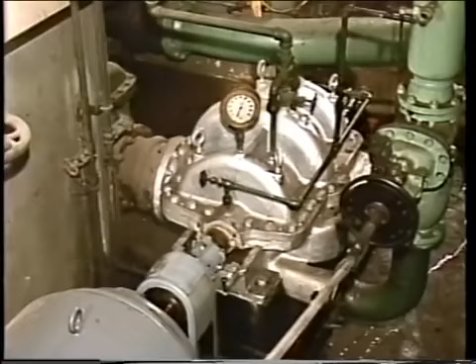Many types of equipment, such as pumps, agitators, or mixers, have rotating shafts that extend from a stationary housing. In nearly every case, some material or device is needed to seal around the shaft to prevent fluids or lubricants from leaking out and to keep contaminants from getting in.

Some equipment has packing material to seal around the shaft. Other equipment has a more sophisticated device known as a mechanical seal.

A mechanical seal is basically a device that is composed of two separate parts, one that mounts to the rotating shaft and one that mounts to the stationary housing around the shaft. When the shaft rotates, the rotating part of the seal spins so close to the stationary part that leakage around the shaft is virtually eliminated.

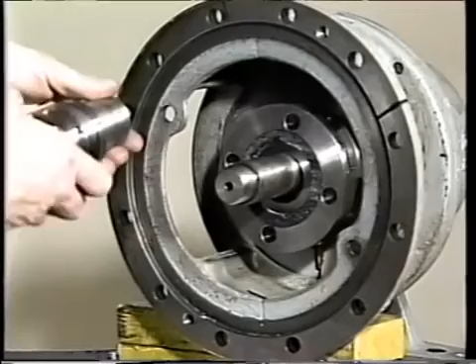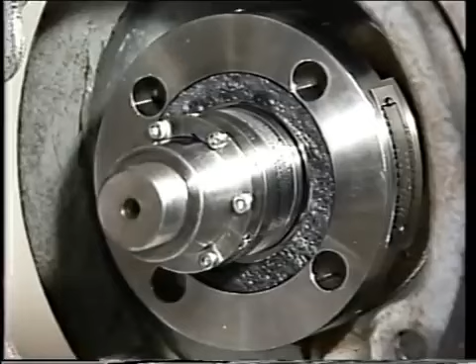There are many types of mechanical seals, and they can be used in many different situations. As a mechanic, you'll need to understand how these seals work and how they're installed. In this program, we'll spend some time examining mechanical seals. We'll see how mechanical seals operate, what needs to be done before a mechanical seal is installed, and how to install different types of mechanical seals.

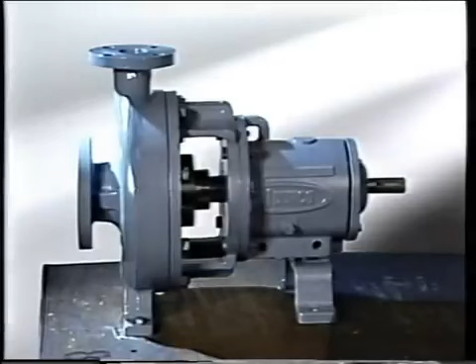Then later in the program, we'll look at some examples of mechanical seal failures. Since one of the most common uses for mechanical seals is in process pumps, we'll use that equipment as an example throughout this program. But before we examine how a mechanical seal works, let's first look at some of the basic parts of a mechanical seal.

Many people consider mechanical seals to be very complex due to the number of internal parts. Actually, mechanical seals are relatively simple.

From this cutaway of a typical mechanical seal, we can see the two basic elements, known as the rotating element and the stationary element. This rotating element, which mounts on the pump shaft and rotates with it, consists of a collar, set screws, a spring, and a rotating ring.

The collar and set screws are used to mount the rotating element to the pump shaft. The collar also provides a point for the spring to work against. The spring is used to hold the rotating ring in its proper position. The rotating ring has a lapped and polished surface, which is called the rotating seal face.

The stationary element mounts to the casing that surrounds the rotating shaft. This part of the seal remains stationary and works in conjunction with the rotating element. This stationary element consists of a gland plate and a mating ring.

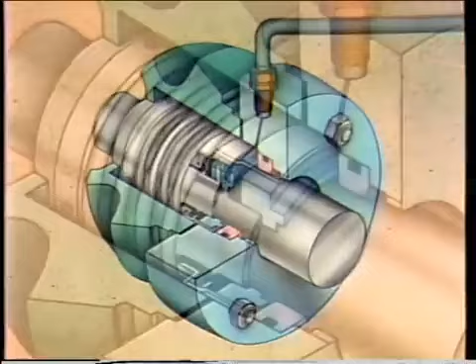The gland plate is a metal plate that mounts to the stuffing box of the pump. It is also the part that the mating ring mounts to. The mating ring also has a lapped and polished surface. This surface is the stationary seal face.

The stationary seal face and the rotating seal face work together to form the primary seal. This area is perhaps the most important sealing surface inside a mechanical seal. The condition of the rotating seal face and the stationary seal face is critical. Both of these surfaces have been lapped and polished to near perfection, and any imperfections could seriously affect the seal's performance.

Mechanical seals can be made from a variety of materials. The type of material used depends on the conditions that the seal must operate in, such as temperature, pressure, and the corrosiveness of the fluid being sealed. For example, the collar, spring, and gland plate are normally made from materials that are highly resistant to corrosion, such as stainless steels, brass, or other alloys.

The seal faces are usually made of materials like tungsten, ceramics, or different grades of carbon. Seal face surfaces made from these types of materials generally last longer.

Also vital to a mechanical seal's operation are O-rings, bellows, and gaskets. Although these items are simple, they serve important functions.

There are several places inside a mechanical seal where fluid could leak. The most noticeable spot is the primary seal surface, which is between the rotating seal face and the stationary seal face. But there are other points, such as around the shaft or casing, that have to be sealed as well.

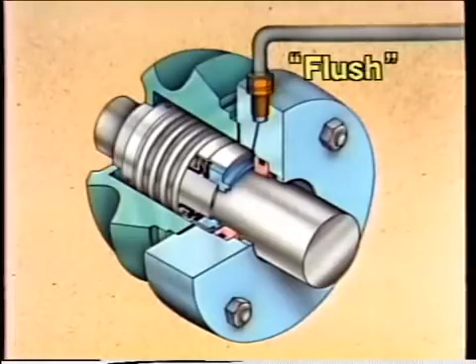First, it helps keep the seal faces separated, and secondly, it provides lubrication for the faces. Normally, this fluid is the same as the fluid being pumped, but in some cases, fluid is supplied to a seal by an external source. This fluid is also known as a flush. A flush can be supplied to a seal in a number of ways, but regardless of how it's done, the purpose is to lubricate and protect the seal faces.

For example, suppose this pump moves a fluid that contains abrasives. There's a possibility that abrasives from the fluid could get between the seal faces. If that happened, the mechanical seal faces could quickly be damaged or ruined. One way to avoid this damage would be to use an external fluid source.

Whether a seal uses the fluid being pumped or an external fluid source to lubricate the seal faces has little to do with the basic operation of the seal itself. All mechanical seals work on the same basic principles and can be divided into two basic categories: pusher type and non-pusher type. This is a cutaway of a pusher type seal.

A pusher type mechanical seal is one in which the rotating ring and the seal located between the rotating ring and the shaft are free to move along the shaft. In other words, the seal slides along the shaft with the ring.

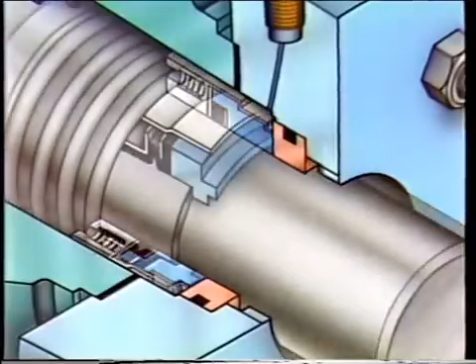A non-pusher type mechanical seal uses a different approach. The rotating ring moves as necessary, but the seal between the ring and the shaft is independent of this movement. Instead of sliding along the shaft, the seal, which is typically a bellows, expands and contracts to prevent leakage.

While there are two basic categories of mechanical seals, most seal manufacturers produce a variety of each. These include inside, outside, and multiple seal arrangements. An inside seal is one of the most common arrangements of mechanical seals. A typical inside seal has the rotating element located inside the casing that's being sealed.

An outside seal has the rotating element mounted outside of the casing being sealed. While the components are generally the same as those of an inside seal, the outside seal installation is different.

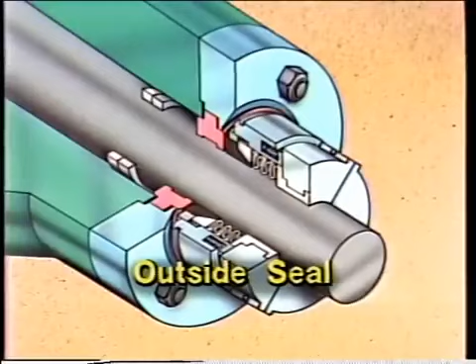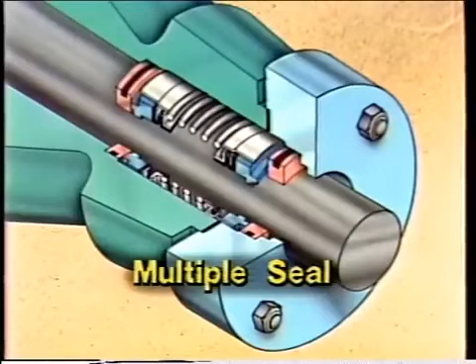Another type of mechanical seal arrangement is the multiple seal. A multiple seal is basically two or more seals mounted so that they work together. Multiple seals are sometimes used on pumps that move hazardous fluids because they further reduce the chance of a fluid leak. There are three common types of multiple seals available: the double seal, the opposed double seal, and the tandem seal.

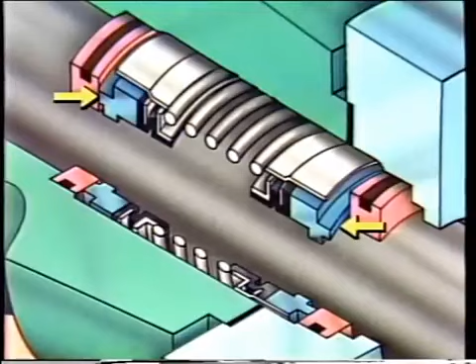A double seal has two stationary elements and a single rotating element. The rotating element has two rotating rings separated by a spring. Each ring has a lapped and polished face that works in conjunction with the two stationary seal faces.

Another type of multiple seal is known as an opposed double seal. An opposed double seal has two rotating elements and a single stationary element. The opposed double seal gets its name from the fact that the two rotating rings work against opposed sides of the mating ring. The third type of multiple seal is the tandem seal.

A tandem seal is basically two independent seals mounted together. Each tandem seal has its own rotating element and stationary element.

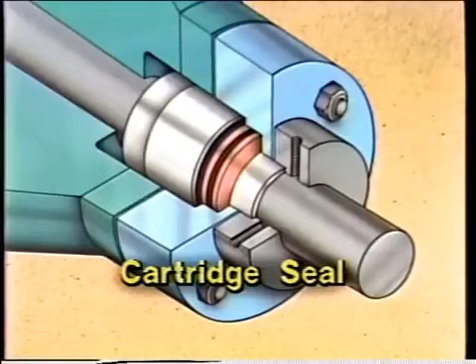Many inside, outside, and multiple seal arrangements are available as cartridge seals. Cartridge seals are designed to make seal installation easier. As you can see, the components of a cartridge seal are mounted onto a sleeve. By having the components pre-assembled, the time spent installing the seal is usually less than that of other seals.

Before any mechanical seal can be installed, certain preparations have to be made. When we come back, we'll see how to prepare for a mechanical seal installation by watching the disassembly of a process pump. But first, take some time to review the material in the text and to answer the questions at the end of the segment.

In the previous segment, we examined the components of a mechanical seal and saw how a typical mechanical seal worked. In this segment, we'll see how a typical process pump is disassembled so that a mechanical seal can be removed.

And replaced. As the procedure takes place, some general precautions should be followed to ensure that the seal can be installed properly. For example, the work area and the pump housing should be cleaned. Company policies and procedures should be followed, and all old gaskets should be replaced.

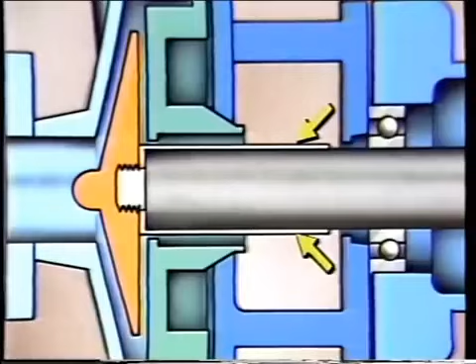Now that we've identified the components, we're ready to start the disassembly. We'll begin the procedure at the point where the pump has been tagged out according to company procedures and moved to a shop. One of the first things to do is to separate the casing from the pump frame.

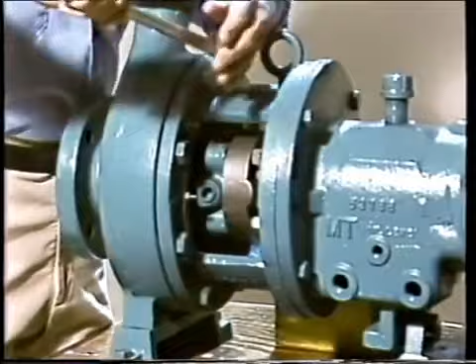In order to do this, the casing bolts must first be removed. Once the bolts are out, the casing and pump frame can be forced apart by installing jacking bolts. These bolts are turned in a crossing pattern to evenly dislodge the casing and frame.

With the casing and frame separated, the frame and bearing housing can be moved to the side to allow for easy access to the remaining parts. The jacking bolts can also be removed. Then the old casing gasket can be removed and discarded. A new gasket will be installed later.

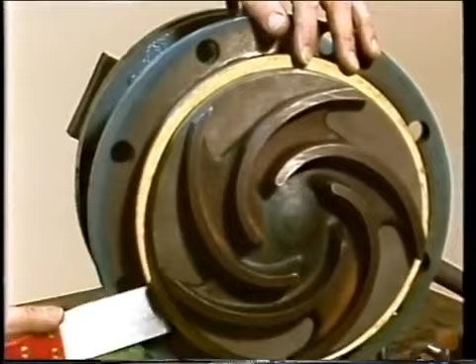Next, the impeller can be removed. The small impeller gasket can then be removed as well. The pump backplate should then be match marked with the frame before it's removed. Match marking these components with a marking pen of some sort makes reassembly and alignment easier.

In order to remove the backplate and the gland plate, the nuts that hold the backplate to the frame are first removed. Next, the nuts on the gland studs are removed and the gland plate is moved back out of the way. The backplate can then be removed and set aside.

This exposes the shaft sleeve and the rotating element of the mechanical seal. Then the shaft sleeve and seal can be slid off of the shaft, along with the gland plate.

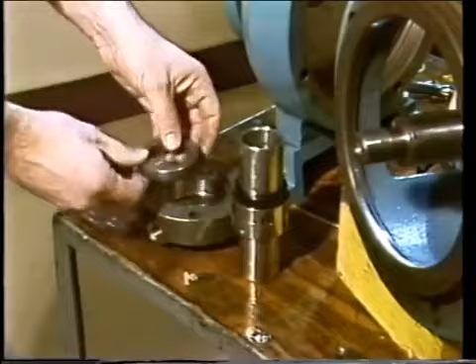Then the mating ring can be removed from the gland plate by simply pushing it out. The collar set screws for the rotating element can be loosened and the element slid off of the sleeve.

That takes care of the first part of the process. The pump has been disassembled and the old mechanical seal components have been removed.

Now, certain checks and measurements must be made before the new seal is installed. One of the first things to do is to check all machined surfaces for nicks and burrs.

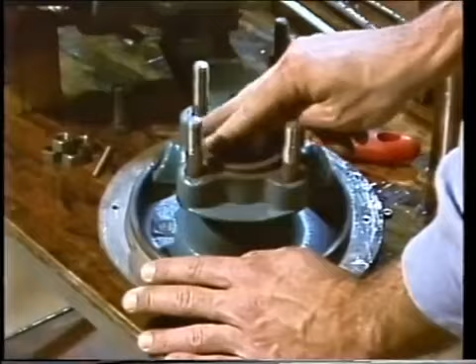Surface defects on the frame, gland plate, stuffing box housing, shaft, or sleeve could result in leaks and damaged components. Minor imperfections in these machined surfaces can usually be removed with a small file or crocus cloth.

Some pumps rely on metal-to-metal contact instead of a gasket or O-ring to seal between the shaft shoulder and the sleeve. On these units, the surfaces should be lapped to remove imperfections and create an acceptable seal.

First, the shaft key is removed and lapping compound is applied to the shaft shoulder. Then the sleeve is placed on the shaft and turned.

After a few minutes, the sleeve can be taken off and the lapping compound removed. The surfaces can then be inspected to make sure that the proper surface contact can be made.

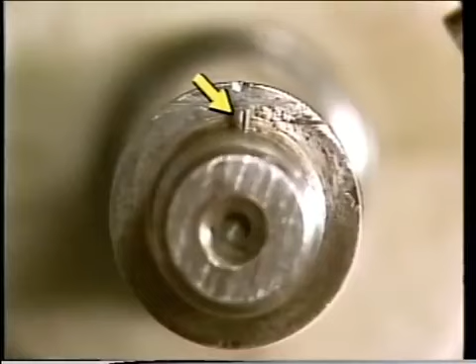The drive pins or keys and their alignment slots should also be inspected for signs of wear or damage. Damaged pins or keys could cause the shaft sleeve to move on the shaft and damage the seal and the pump components.

There are other important checks that should be made before a mechanical seal is installed. Some of these checks involve the use of dial indicators to make precise measurements of the pump. One important check is testing for shaft runout.

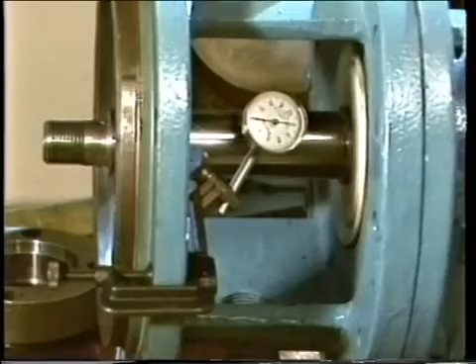A shaft that is bent or out of round can damage other pump components and make a mechanical seal virtually worthless. One way to check for shaft runout is to mount a dial indicator to the pump frame, with the

indicator button touching the surface of the shaft, perpendicular to the shaft's axis. The dial indicator is then zeroed and the shaft rotated.

The dial indicator should measure any shaft runout present. Excessive runout will prevent the seal from functioning properly. To determine if the runout measured is excessive, you'll need to refer to your company's policies and procedures or to the manufacturer's specifications. The process should be repeated with the shaft sleeve and the impeller in place to check for sleeve runout.

Excessive sleeve runout could also cause serious problems. Once the sleeve runout check is complete, the impeller and sleeve can again be removed from the shaft.

Dial indicators can also be used to check the wear of both the radial and the thrust bearings that support the shaft. To check radial bearing wear, a dial indicator is mounted above the shaft with the indicator button touching the top of the shaft. The shaft is then carefully lifted and the dial indicator measures any radial movement.

Excessive radial movement could indicate worn bearings. Once again, you'll need to refer to the manufacturer's guidelines to determine if the amount of radial bearing wear is acceptable.

One way to check the thrust bearing wear is to mount the dial indicator so that the indicator button is touching the end of the shaft. The dial indicator is set to 0 and the shaft is moved back and forth. The dial indicator will measure the total movement of the shaft. Excessive axial shaft movement could be an indication of worn thrust bearings.

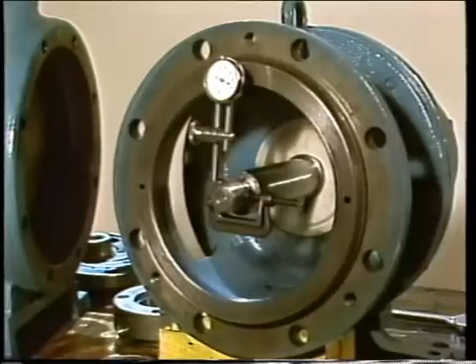The final check using a dial indicator involves checking the machined surface of the pump frame to see if it's perpendicular to the shaft. Since the pump back plate, which also forms the stuffing box where the mechanical seal components fit, mounts directly to this frame, it is essential that the frame is perpendicular to the shaft.

Checking the frame is done by mounting a dial indicator on the shaft so that the button touches the machined surface of the frame. With the dial indicator zeroed, a mark is made at the starting position and the shaft is rotated. A reading is taken at the 12 o'clock, the 3 o'clock, the 6 o'clock, and the 9 o'clock positions.

If the frame surface is not perpendicular to the shaft, then the back plate and the stuffing box will be misaligned as well. And misalignment of these components could cause premature seal failure.

Now, it's important to remember that any shaft adjustments or repairs that are necessary must be made before the mechanical seal is installed. Adjustments that are made after the seal is mounted could easily alter the position of the rotating element and cause serious seal damage or failure.

So far, we've seen how to disassemble a pump and make all the necessary checks and measurements so that a mechanical seal can be installed. When we come back, we'll continue the process by looking at how to install an inside pusher seal.

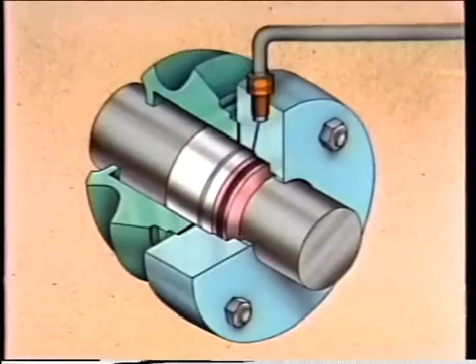In the last segment, we saw how to disassemble a process pump and remove an old mechanical seal. Now we're ready to install a new mechanical seal, in this case, an inside pusher seal. As you recall, an inside pusher seal mounts inside the pump casing. And again, the components can be broken down into two separate elements, the rotating element and the stationary element.

Once all the preliminary checks that we discussed earlier have been made, the seal installation can begin. Now, the procedures we'll follow could be slightly different from the ones you'll use because of differences in seal applications and company policy, but the general principles should still apply.

In the first part of the installation, some of the pump components are assembled so that measurements can be taken. These measurements are used later to position the components of the mechanical seal.

Since this pump is equipped with a shaft sleeve, one of the first steps is to position the sleeve onto the shaft, making sure that the sleeve is properly engaged on the drive pins or keys. An improperly positioned sleeve could be damaged or ruined when the impeller is installed.

This shaft sleeve has a small lip that butts against the shaft shoulder, where the shaft threads begin. This lip is sandwiched between the impeller and the shaft shoulder when the impeller is installed later.

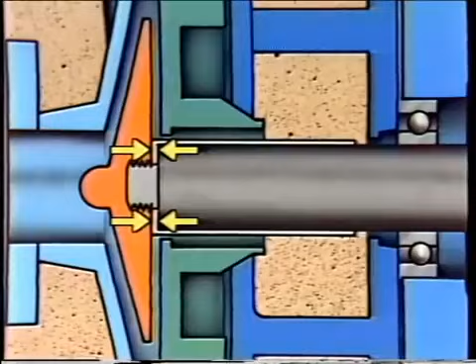Once the sleeve is in place, the pump backplate is positioned onto the frame. The match marks between the backplate and the frame should be checked to make sure that the backplate is properly aligned. Once the backplate is in place, the nuts that hold it onto the frame should be tightened evenly.

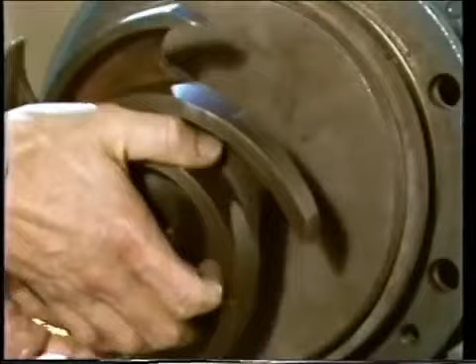Next, the impeller is installed. Once the impeller is in place, the clearance between the impeller and the backplate should be checked to ensure that the impeller is properly positioned.

Since the impeller on this pump holds the shaft sleeve in place, if the impeller is out of position, the shaft sleeve and the mechanical seal components could be out of position as well. And if these components are out of position, the mechanical seal could fail.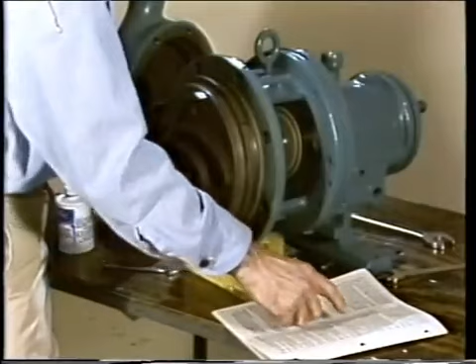Here, the pump manufacturer's prints are checked to get the proper clearance figures. Then a feeler gauge is used to check the gap between the impeller and the backplate. The feeler gauge reading can then be used to determine if the impeller is properly positioned.

After the impeller clearance has been measured, the shaft sleeve has to be marked so that the rotating element can be positioned later. This is done by first applying bluing to the shaft sleeve along the edge of the stuffing box. Then a line is scribed in the bluing to mark the end of the stuffing box. This becomes a reference line for positioning the rotating element.

Once the line is marked, the pump components can be disassembled again. First, the impeller is taken back off. Then the nuts that hold the backplate in place are removed, and the backplate is taken off of the pump frame.

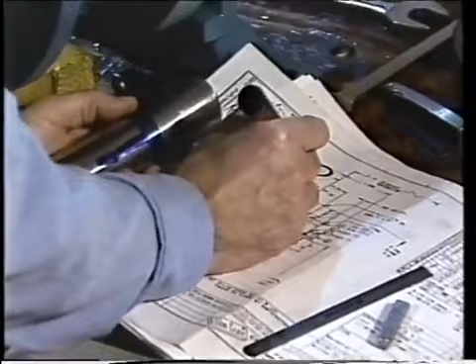Finally, the sleeve is removed from the shaft and additional bluing is applied, this time along the length of the sleeve. Next, the pump or seal manufacturer's prints are checked to get the figure used to determine where the rotating ring collar will be mounted on the shaft sleeve.

This location dimension is then used to measure along the sleeve from the line marking the edge of the stuffing box. At that point, a second line is scribed in the bluing. Once the measurements have been made and the mark has been scribed in the sleeve bluing, the second part of the installation process can begin.

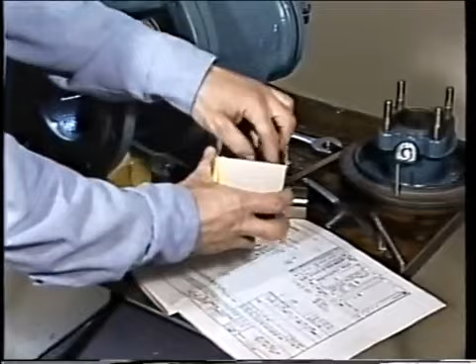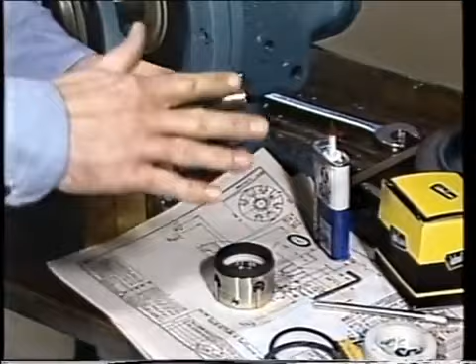First, the mechanical seal components, which include new gaskets and O-rings, a mating ring, and an assembled rotating element, can be inspected for damage. Once the parts have been inspected, a small amount of lubricant is applied to the shaft sleeve. Next, the rotating element is slid onto the shaft sleeve.

The end of the rotating element collar that is opposite the seal face is then aligned with the second scribe mark. If the rotating element is not properly aligned, the seal could fail prematurely.

Next, the set screws on the collar are tightened just enough to hold the collar in place. If the set screws are over-tightened, the sleeve could become oval-shaped and may not fit on the shaft properly. The screws will be tightened the rest of the way later when the sleeve is installed on the shaft.

Many seal manufacturers use retaining clips, like the one seen here, to compress the springs and hold the parts of the rotating element together before it's installed. Once the rotating element has been secured to the sleeve, these clips can be removed.

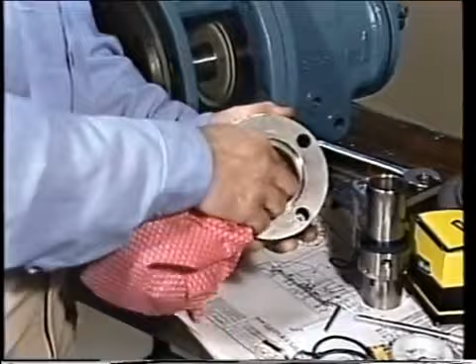The next step is to prepare the mating ring for assembly into the gland plate. First, the gland plate should be wiped clean with a rag. Then the O-ring can be installed onto the mating ring. Next, the gland plate is lubricated to make the mating ring installation easier.

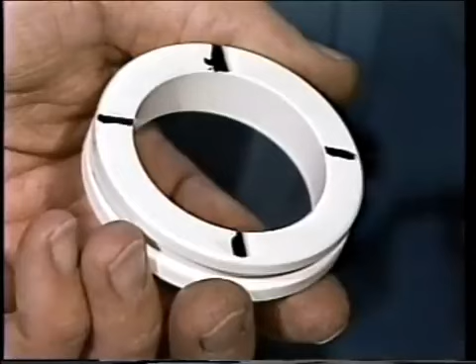As you recall, the mating ring has a polished side and an unpolished side. Most manufacturers mark the unpolished side of the ring so that it can be told apart from the polished side. The mating ring is inserted into the gland plate so that the unpolished side goes in first. This will allow the polished side of the mating ring to face toward the rotating seal face once it's installed.

The mating ring should be fully inserted into the plate and must not be cocked to either side. The gland plate can be turned over so that the back side of the ring can be checked to ensure that the mating ring is properly situated.

Once the mating ring is in place, all excess lubricant should be removed with a clean cloth. Also, the mating ring face should be cleaned with lens paper and an approved solvent.

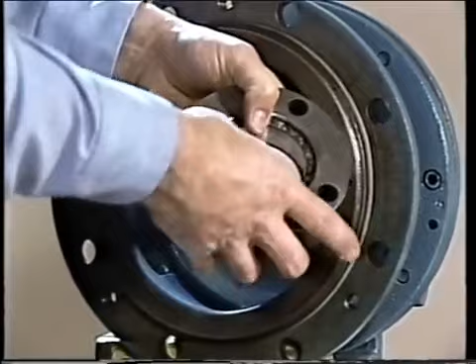Then the gasket between the gland plate and the stuffing box is positioned on the gland plate, and the gland plate is slid onto the shaft and pushed back against the bearing housing out of the way. Then the rotating seal face is wiped clean with lens paper and an approved solvent.

And the shaft sleeve, which has the rotating element mounted on it, is slid onto the shaft. The gland plate should be supported while the sleeve is installed, and the sleeve should be pushed back until the sleeve lip is flush with the shaft shoulder. Again, make sure that the keyway on the sleeve lines up with the pin or key on the shaft.

Once the shaft sleeve is in place, the set screws on the rotating element collar, which were simply snugged earlier, can be tightened down completely.

Next, the back plate, which includes the stuffing box, is placed onto the frame. The back plate should be properly aligned with the frame match marks, and the stuffing box studs should align with the gland plate. Then the nuts that hold the back plate in place should be tightened.

Now the impeller can be readied for installation. On this pump, a small O-ring is used to seal between the impeller and the shaft sleeve. Once the O-ring is in place, the impeller can be installed.

Again, the clearance between the impeller and the back plate should be measured with a feeler gauge and checked against the pump manufacturer's specifications. If the reading is unacceptable, it could indicate that the shaft sleeve and rotating element are improperly positioned. Any indication of a problem should be investigated to prevent premature seal failure.

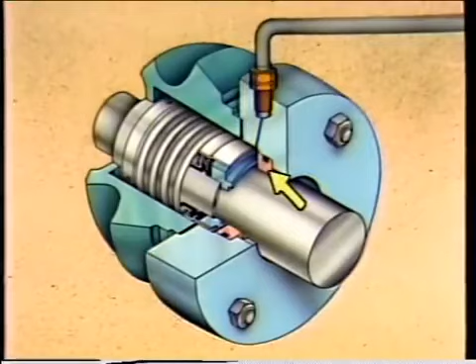We'll begin by looking at an illustration of a typical non-pusher elastomer bellows seal. Here's the rotating element, which consists of a collar with set screws, a single spring, a rotating ring, and the elastomer bellows. The stationary element is simply a gland plate and a mating ring with an O-ring that fits into the gland plate.

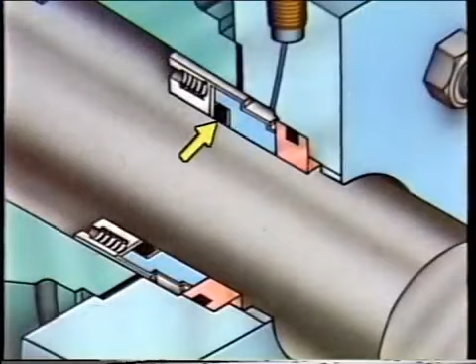You'll recall that the major difference between a pusher seal and a non-pusher seal is the arrangement of the seal between the rotating element and the shaft. While a pusher seal has an O-ring or a wedge to seal this area, a typical non-pusher seal has a bellows. This bellows expands and contracts to seal between the rotating element and the shaft. The expansion and contraction of the bellows also allows for axial movement of the rotating element on the shaft.

Another difference between the pusher seals that we saw earlier and this non-pusher seal involves the rotating element spring. This seal has a single spring, whereas the other seals had a set of springs. Now, the installation of the non-pusher seal is very similar to that of the pusher seal that we saw earlier. The major difference is in how the rotating element is assembled onto the shaft sleeve.

We'll begin the installation procedure from the point where the shaft sleeve has been blued and marked to indicate the edge of the stuffing box. In other words, all of the preliminary steps have been done, and the seal installation is ready to begin.

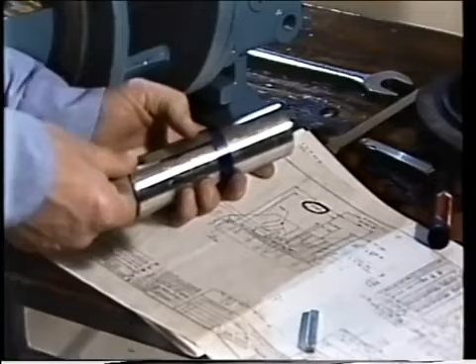As before, the manufacturer's print should be checked to get the location dimension, which is used to position the rotating element. The figure is then used to measure along the shaft sleeve from the line marking the edge of the stuffing box. At that point, a second line is scribed.

The collar for the rotating element is then slid onto the sleeve so that the end of the collar opposite the seal face is positioned at that second line. The set screws are partially tightened so that the collar is held in place, and the spring is positioned on the sleeve. Then a small amount of lubricant that's approved by the seal manufacturer is applied to the outside of the sleeve.

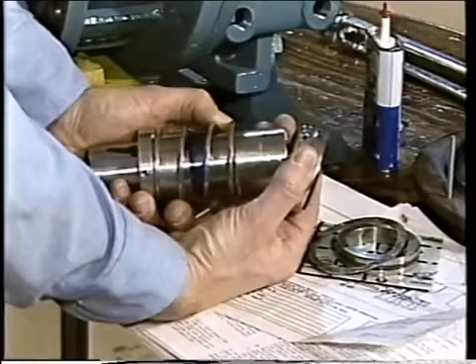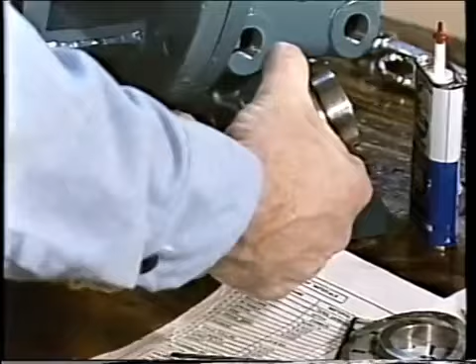What happens next is different from what we saw before. As the rotating ring is placed onto the sleeve, the elastomer bellows makes contact with the lubricant and causes a bonding action between the bellows and the sleeve. Because of this, the rotating ring must be properly positioned against the spring as quickly as possible before the material bonds itself too tightly.

Once the rotating ring has been positioned on the shaft sleeve, the remaining steps are basically the same as the ones we saw for the pusher seal. As you've seen, the non-pusher seal and the pusher seal share some common components, and many of the installation procedures for these two types of seals are the same. But because of certain design features, the elastomer bellows seal has a few advantages over pusher-type seals.

For example, since the bellows of the non-pusher seal bonds to the shaft sleeve, there is no movement between the bellows and the sleeve. As a result, there's less of a chance that it will leak.

Because many non-pusher seals are equipped with elastomer bellows, some can only be used in moderate temperature and pressure ranges. However, there's one type of non-pusher seal that is designed for high temperature and pressure ranges. That's a metal bellows seal.

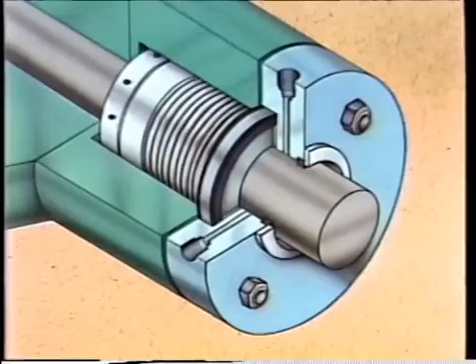The components of a metal bellows seal can be made from a variety of materials, which make it possible for the seal to be used in temperatures ranging from around -100 degrees Fahrenheit to around 800 degrees Fahrenheit. One of the most noticeable features of this seal is that it uses a flexible metal bellows instead of a spring. This bellows expands and contracts to compensate for axial movement of the shaft and for seal face wear.

It also seals between the rotating element and the shaft, like the elastomer bellows did in the example we saw earlier. The bellows can be a single piece of metal shaped into a bellows, or it can be a series of metal plates welded together. Either way, one end of the bellows is welded to the collar, and the other end is welded to the rotating ring. Another difference in this metal bellows seal is in the design of the collar.

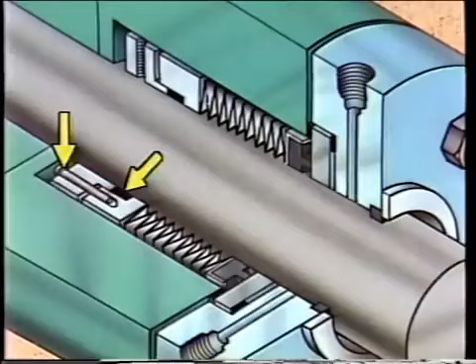You'll notice that there are two sets of screws. One set is used to hold the rotating element in place, like the ones we saw earlier. The other screws are used to compress a gasket located here, which also seals between the rotating element and the shaft. There's another added feature on this seal, an auxiliary bushing. The main function of this bushing is to direct any leakage from the primary seal to an outlet or discharge area. It's held in place on the gland plate with two small bolts.

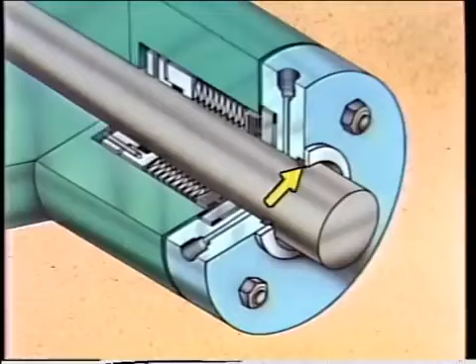With the exception of a couple of steps, the installation of a metal bellows seal is basically the same as the procedures we saw before. Once again, we'll begin the installation procedure after all the preliminary checks have been done and a line has been scribed to mark the end of the stuffing box. Once the location dimension has been found on the manufacturer's prints and a second line has been scribed on the shaft sleeve, the rotating element is installed, and the set screws are partially tightened to hold the collar in place.

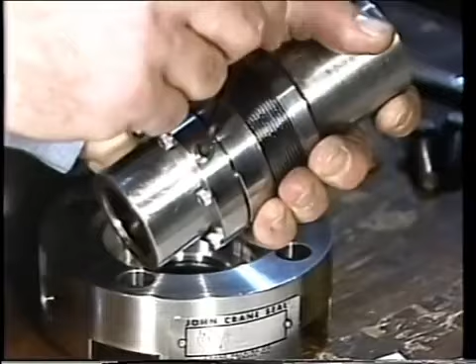Next, since this type of seal uses a gasket to seal around the shaft sleeve, the cap screws on the collar are tightened to compress the gasket. These screws should be tightened in a crossing pattern so that the pressure against the gasket is even.

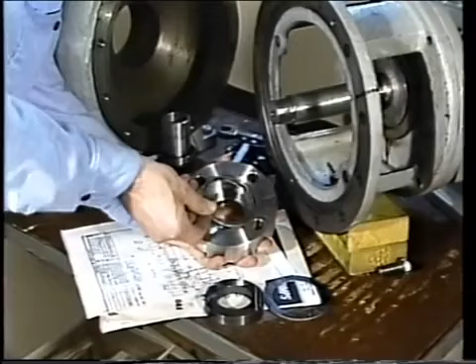Now, the next steps are the same as we saw earlier. First, the gasket for the mating ring is inserted into the gland plate, along with the mating ring itself. Then the gasket that seals between the gland plate and the stuffing box is placed on the gland plate, and the gland plate is slid onto the shaft.

Next, the shaft sleeve is positioned on the shaft, and the collar set screws are tightened the rest of the way. Once the sleeve is in place, the pump backplate is installed. Then the impeller is installed, and the clearance between the impeller and the backplate is checked to make sure that the components are properly positioned.

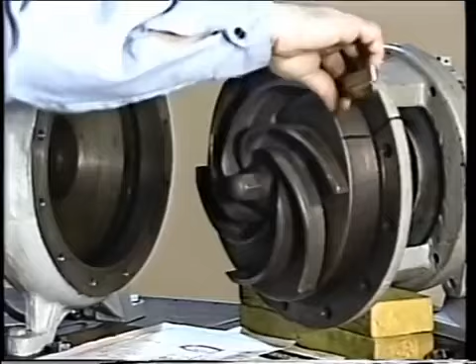Once the impeller clearance has been checked, the gland plate is bolted to the stuffing box, and the gap between the stuffing box and the gland plate is measured to ensure that the gland plate bolts have been properly tightened.

The final step is different from what we've seen before. The auxiliary bushing that we looked at earlier should be secured by tightening the two mounting bolts. Once that's done, the seal installation is complete. The pump can now be reassembled and returned to service.

In this segment, we examined two types of non-pusher mechanical seals, an elastomer bellows seal and a metal bellows seal. We saw how they differed from the seals that we looked at earlier, and we saw how they're installed. When we come back, we'll take a look at two more types of mechanical seals, an outside seal and a cartridge seal.

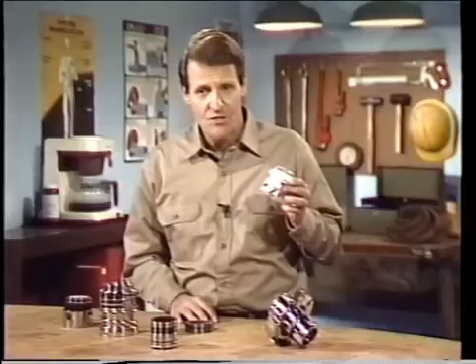Up till now, we've seen how to install a pusher-type seal and a couple of non-pusher-type seals. Now we'll examine the installation of an outside seal and a cartridge seal. In general, outside seals are among the simplest types of mechanical seals. You'll recall that outside seals are mounted outside of the pump casing, so they're generally easier to install.

Let's begin by looking at the components. Here we see the two familiar elements, the rotating element and the stationary element. While the mating ring and gaskets are basically the same as those in other types of seals, a few of the components are different from what we've seen before.

On the seal we'll be using, the bellows used to seal between the rotating ring and the shaft is made of a different material. This material allows this seal to be used in more severe applications than the elastomer bellows type.

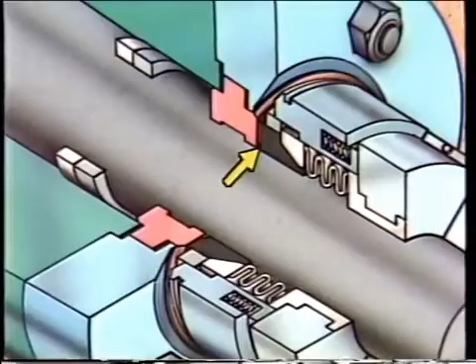The rotating seal face is also different. In this seal, the rotating seal face is a replaceable carbon ring. Also, there are no collar set screws. Instead, the collar itself is a clamp-like ring with two small bolts, which are tightened to secure the collar to the shaft.

There's also a bushing that fits into the stuffing box to help prevent debris from entering the seal and to reduce the amount of external lubricating fluid that escapes. The bushing is held in place with a small screw. The pump we'll be using has no shaft sleeve.

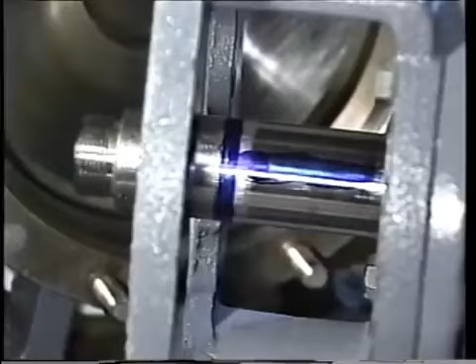As we begin the installation, the preliminary checks have been completed. The shaft has been blued and a line has been scribed to mark the edge of the stuffing box. Using the location dimension found in the manufacturer's prints, a measurement is made from the first line. This time, however, the measurement is made in the opposite direction, away from the impeller end of the shaft. A second line is then scribed at that point.

Once the second line is scribed on the shaft, the rotating element can be placed on the shaft and slid back against the bearing housing.

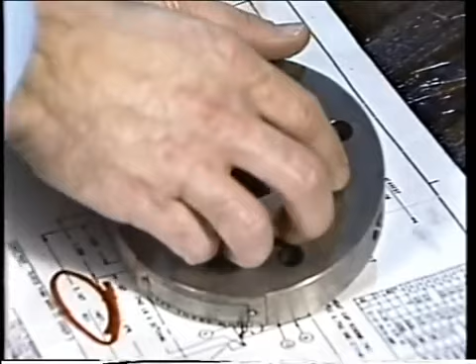Next, the stationary element is prepared for installation. This is done by first installing a gasket into the gland plate, then installing the mating ring. On this seal, the polished face of the mating ring is installed so that it will face away from the stuffing box. Then a second gasket is installed, and the gland plate assembly is ready to be installed onto the shaft.

As the gland plate is installed onto the shaft, it should be slid back as far as possible and positioned against the rotating element that was just installed.

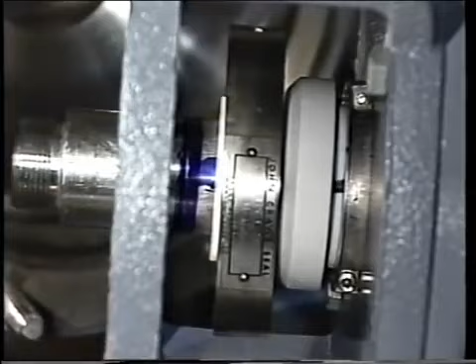With the rotating element and the stationary element on the shaft, the back plate can be prepared for installation. First, the bushing mentioned earlier is inserted into the stuffing box and secured with the screw. Then the back plate can be installed on the pump frame.

Next, the gland plate can be slid into position and the cap screws tightened. Then the gap between the gland plate and the back plate is checked with a feeler gauge to ensure the gland plate was properly tightened.

Once that's done, the rotating element can be positioned so that its collar is aligned with the second scribe line on the shaft. Then the clamping screws can be tightened.

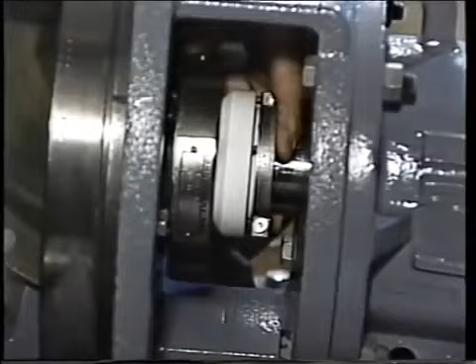Once the rotating element is in place, the impeller can be installed and tightened. The clearance between the impeller and the back plate should be measured with a feeler gauge and compared with the manufacturer's specifications to ensure that the components have been installed correctly.

The seal installation is now complete, and the pump can be reassembled and returned to service. The installation of the outside seal was somewhat different from the earlier examples. Our next example, a cartridge seal, is different as well.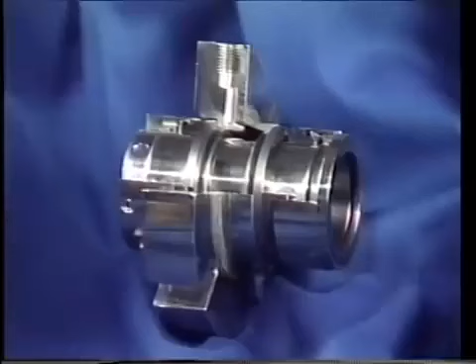This particular cartridge seal is a multiple seal—that is, there are basically two seals mounted in series. Each seal has its own rotating element and stationary element. But there is one feature of the cartridge type seal that differs from the other types: the components are pre-assembled onto a sleeve and gland plate. This reduces the time necessary to install the seal.

The shaft sleeve also includes a collar, set screws, and an O-ring. The collar and set screws are used to hold the sleeve in position on the shaft, and the O-ring prevents fluids from leaking out between the shaft and the sleeve. Now let's see how the seal is installed. As before, we'll begin the installation after the pump has been disassembled and all preliminary checks have been completed.

First, the cartridge is slid over the shaft and positioned so that the drive pin engages the slot on the cartridge sleeve. Then the back plate is aligned and positioned against the pump frame and bolted into place.

Once the back plate has been secured, the gland plate can be bolted to the stuffing box housing. The bolts should be tightened using a crossing pattern so that all the bolts are tightened evenly. Then the clearance between the gland plate and the stuffing box is checked with a feeler gauge at each bolt to make sure that the bolts were tightened evenly.

Once that's done, a new gasket is placed on the impeller, and the impeller is installed. With the impeller in place, the gap between the impeller and the pump backplate should be checked to make sure that the components have been installed properly.

The seal installation is now complete, and the pump is ready to be reassembled and returned to service.

Well, we've seen several variations of mechanical seal installation, some more complicated than others. While there may be slight variations in the installation procedures, depending on the type of seal you're using and on the equipment that the seal is being installed on, most of the basic steps are the same. One thing that does hold true for all mechanical seals is that they're all susceptible to problems. And in the next segment, which is the last segment in this program, we'll take a look at some mechanical seal failures.

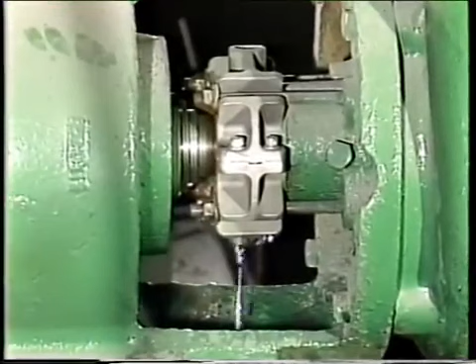Although mechanical seals are designed to last a long time, many seals fail long before their life expectancy is reached. This final segment will focus on some of the reasons that mechanical seals fail prematurely and how to identify causes of common seal failures by examining the seal components.

A mechanical seal can fail for many reasons. One of the most common causes of seal failures has little to do with the seal itself. It involves the equipment that the seal is installed on. In many cases, the equipment is in such poor condition that the mechanical seal cannot function properly. As a result, seal failures occur. However, by following the preliminary checks described earlier, the chances of a seal failure occurring because of equipment problems is greatly reduced.

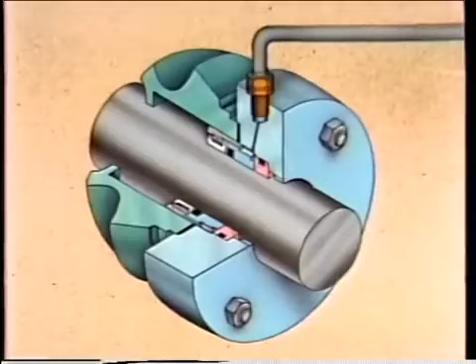Sometimes mechanical seals fail for other reasons, such as the widening of the seal face gap, overheating, material breakdown, and improper installation. First, let's examine seal failures caused by the widening of the seal face gap. As you recall, when a mechanical seal, like the one illustrated here, is in use, the rotating seal face and the stationary seal face are separated by a tiny gap. A thin layer of fluid fills this gap to lubricate and protect the seal faces. But if the seal face gap widens, too much fluid enters the gap and the seal leaks. So, for a mechanical seal to function correctly, the proper gap must be maintained.

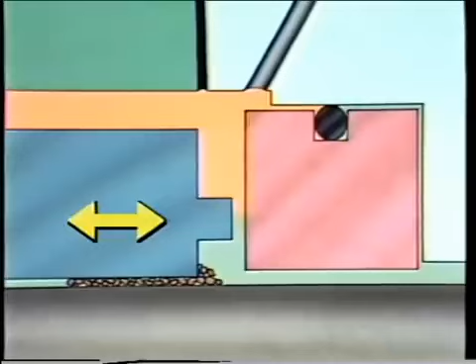Now, a lot of things can cause the seal face gap to widen, but it usually happens because of a problem with the rotating element. One common problem occurs when the rotating ring sticks to the shaft. The rotating ring is designed to move along the axis of the shaft to compensate for seal face wear and for axial movement of the shaft. Even though the ring can travel only a short distance along the shaft, that movement is essential to the seal's operation. When solids build up on the shaft or spring, sticking can occur. This can prevent the rotating ring from moving properly.

Abrasives can also cause the seal face gap to widen. For example, particles, such as those found in some abrasive liquids being sealed, can lodge between the seal faces. These particles could force the seal faces apart, or they could prevent the two seal faces from touching when the unit is stopped. In either case, the seal could leak.

The seal face gap can also widen if either seal face becomes distorted. As we saw before, one cause of seal face distortion is over-tightening the gland bolts. Tightening these bolts too much can cause the seal face to warp. Another reason for this distortion is overheating.

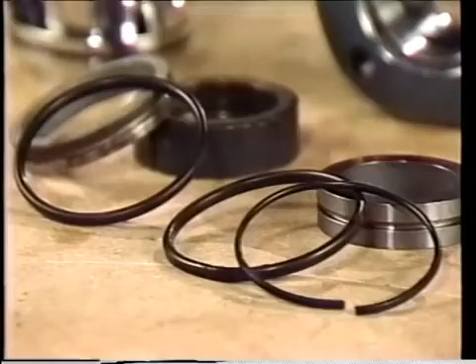Heat is often a part of a machine's operation, and mechanical seals are designed to operate under those conditions. But sometimes the heat becomes so severe that the seal parts begin to break down. Severe heat can result from a number of things, such as friction caused by a misaligned shaft, defective bearings, or foreign material trapped in the seal. Overheating can also result from the material being pumped. If the liquid itself becomes overheated, seal components can begin to break down.

Overheating can cause the rubber-like materials in a mechanical seal to become brittle and break apart. In addition, severe heat can also increase the rate at which corrosion occurs on metal components.

Sometimes the fluid being sealed by a mechanical seal causes problems that aren't related to overheating. For example, seal components may be damaged or destroyed if they're chemically incompatible with the fluid being sealed. The seal parts most susceptible to chemical compatibility problems are the O-ring, the bellows, and the seal faces.

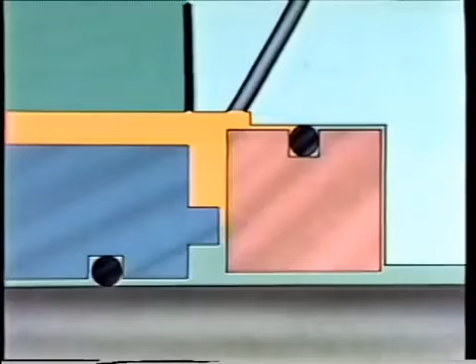If the O-ring isn't compatible with the fluid being sealed, it could expand and harden. The expansion of the O-ring may cause misalignment of the seal faces and lead to a rapid seal failure. Hardening makes the O-ring brittle, which means that it could break and cause a leak.

The seal faces may also be attacked by the fluid being sealed. One way to tell if this has happened is by examining the seal faces for damage. Since the materials used to make the seal faces are generally corrosion resistant, corroded or pitted seal faces could indicate a chemical compatibility problem. Another category of seal failures involves the installation of the seal.

Improper installation can affect just about every component and every aspect of a mechanical seal. One of the most frequent problems encountered during installation concerns the positioning of the rotating element. If the rotating element is not properly positioned, the seal will almost certainly fail prematurely.

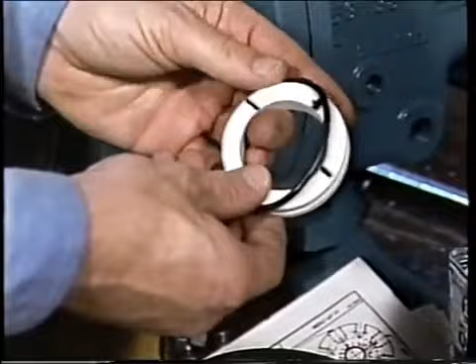The mishandling of seal parts before and during installation is another problem that can lead to seal failure. The seal faces are the easiest part to damage because they're usually quite brittle and may be damaged while being handled. Some mechanical seal parts can be damaged as they're being installed. For example, O-rings or bellows are sometimes cut by sharp edges on the shaft, such as shaft shoulders or shaft keyways.

The mechanical seal problems that we've just examined certainly don't include every possible failure, but it should give you some idea how many of the common problems arise. Now let's go one step further. Let's see how to identify some of these problems by examining the wear patterns on seal faces.

A normal wear pattern on the stationary seal face is seen as an even ring of wear that matches the width of the rotating seal face. The wear pattern should be continuous and centered on the seal face.

If the wear pattern is narrow, it could be an indication that the faces are not parallel. It could also mean that the faces are not flat. If the wear pattern is wider than the rotating seal face, it could mean that there's a bent shaft or worn shaft bearings.

If the wear pattern is even but off-center, then the stationary element may not be properly positioned in the stuffing box. If the wear pattern is uneven or has gaps, the seal face may be distorted. This could be caused by overheating or by over-tightening the bolts that hold the gland plate in place.

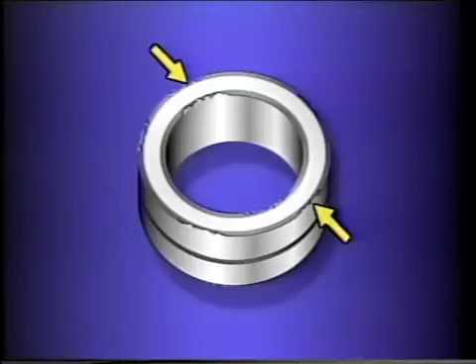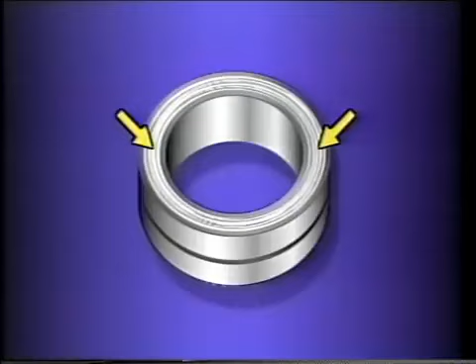If the seal faces are chipped, it could mean that the seal was mishandled. If the faces are chipped only along the inside diameter, there is the possibility that foreign material was trapped in the seal. Sometimes seal faces have a grooved appearance, like a phonograph record. These grooves could have been produced by foreign material trapped between the seal faces.

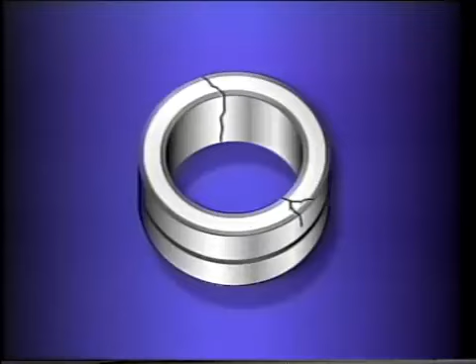Sometimes cracks are found in a seal face. A seal face can crack for a number of reasons. One of the most common reasons is that the seal was mishandled. For example, the seal face may have been dropped. A cracked mating ring could be an indication that the gland bolts were over-tightened. Hairline cracks found in metallic seal faces may indicate overheating.

In this segment, we've seen some of the problems that lead to mechanical seal failures. We also saw how examining the seal components can help identify the cause of the problem.

Now, as you've seen in this program, not all mechanical seals are the same. Likewise, not every maintenance department follows the same procedures. The examples and procedures used in this program were general in nature and may not always apply to the seals in your plant. To properly install or maintain a mechanical seal, you must follow your plant's procedures and the recommendations of the seal manufacturer.